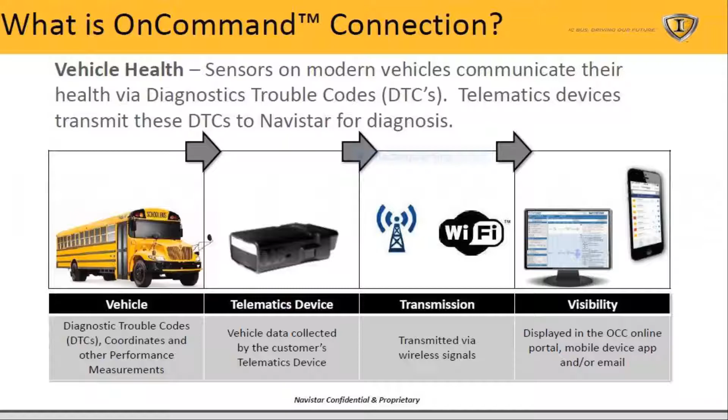Productivity, service information, and of course, the next generation now out there in the business is electronic driver logs. Next, please. Thank you, Marcia. So we've got a vehicle. What I do every day is work with a customer, work with a national fleet, work with a dealer. They have a light on the dash and they have a concern. So telematics takes that DTC through the telematics device, transmits it, and makes it visible on a screen. It could be on your phone, it could be on your laptop, however you want it to come through, or both, of course. Next, please.

So it's a remote diagnostic process. It'll increase vehicle uptime because it's almost instantaneous. We're talking in minutes. It'll certainly decrease the cost per student for transportation because you become more proactive in the repairs rather than reactive. You know, how many of you have had drivers that'll drive the bus no matter how many lights are on the instrument panel, as long as the wheels turn around, right?

Because it's their bus, it's all set up for them and for their kids. So most importantly today, what we'll talk about is that it's able to streamline the communications between you, Neal, and Navistar. And that's the link. That's very important, you know, for customers that are in remote areas, too far away.

And I've driven in Baltimore and Washington. I lived in Leesburg at one time, 2.5 hours to get downtown DC. So I know about transportation and the terrible roads. So this is an opportunity to make this communication process very, very easy.

Out there at the school districts, it helps the process from dispatch, drivers, and technicians, and we'll talk more about that. It's all-makes capabilities.

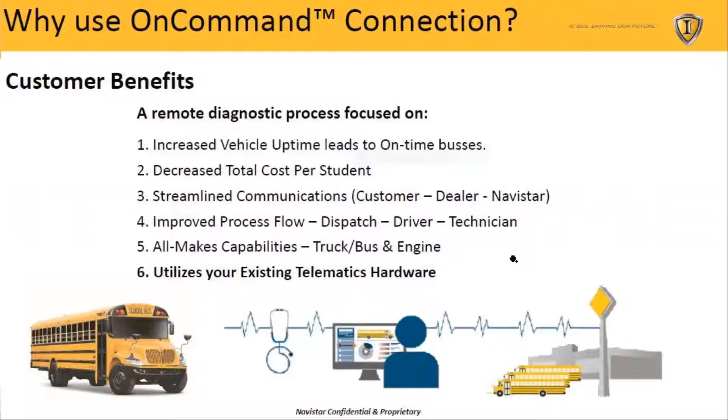If you ever watch those TV commercials about safe drivers, what do you think's in that vehicle? It's a box, it's telematics, and what are they doing? They're monitoring your speed. Are you doing 55 in a 45, or are you a quote safe driver? And the best part is our system, OnCommand Connection for Service, utilizes just about everybody's telematics hardware, as I've mentioned before.

So what do I see out of this? What do we do every day? What does Marcia's team, the Neal service team, do every day? They'll go in and they can monitor the vehicle. They can pull up the screens. They can look at fault code severity, scheduled maintenance, fault families, advanced filtering, and so on. But most importantly, health reports, vehicle GPS location, access to the service portal, and certainly repair advocate and service partner, some other programs that we have in the system.

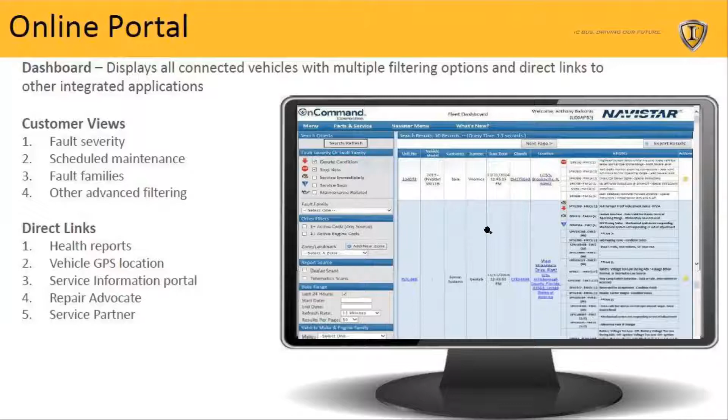So you'll hear me harp about this. In order to repair the vehicle, we have to have access to the service portal or the dealer, certainly, so that we can start the process. And using this service portal access can help you navigate through by hyperlinks to diagnose the vehicle, find the parts, understand what tools you need, who has the parts, and certainly repair the vehicle.

So once we have access, we have telematics. Now we have a vehicle with a concern. We can go into the service portal, go into that front page that we just showed you, then click on connection, and we see the information coming from the telematics device. And the next thing we're going to do is click on that. We're going to get a health report.

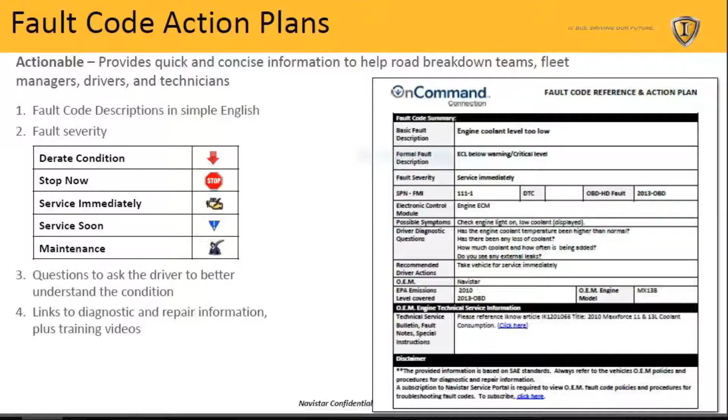So in probably the last 10 years, we have worked hard with this process. And, you know, IT people, service engineers, service people. So you have an action plan. We have a fault ranking to help you start working through this, because maybe you got multiple DTCs. They will give you guided questions.

The parts radar is, they will say most likely this part will need to be replaced based on the code, based on information that we have obtained. And the part is actually located at Neal, as an example. This impact report, tremendous amount of information, and we'll see that in a little bit.

One of the things the industry has done with DTCs, they created synthetic DTCs. How many times have you used your diagnostic tool and you found out you got a ton of DTCs? Which one do I work on first?

Many times manufacturers, including us at Navistar, will take from data these DTCs and say, if you have this, this, and this, we will create a synthetic DTC, and that will encompass all those DTCs and give you the one to start with. And we'll talk a little bit about that later.

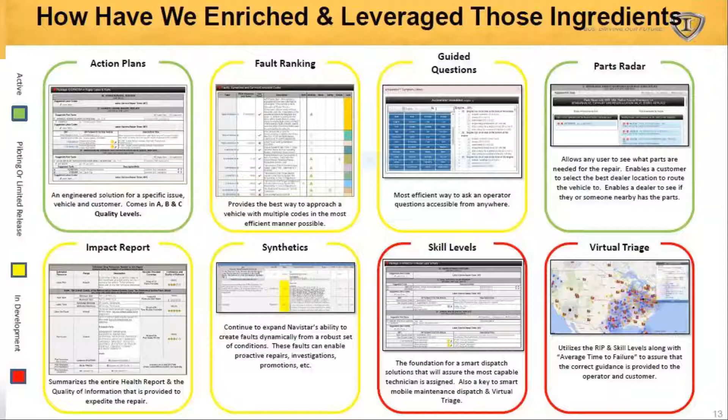and you simply turn on the key on the vehicle, plug this into the data link, push the little button, and what it'll do is it'll set a health report. A little bit different than ours, but it'll give you the information needed. And as an example, it will create that health report.

And let's say that you're handling 70 buses and you've only got one technician. So maybe you could call the Neal team and say, I've got a bus that's got a light on the dash and I'm really overwhelmed right now with state inspections, blah, blah, blah. Can you guys look at the health report and give me some assistance?

And they could very easily pull that up in the service portal, and they could come back and say, it's the left front wheel speed sensor. You want us to send you down the part, or let me walk you through the diagnostics.

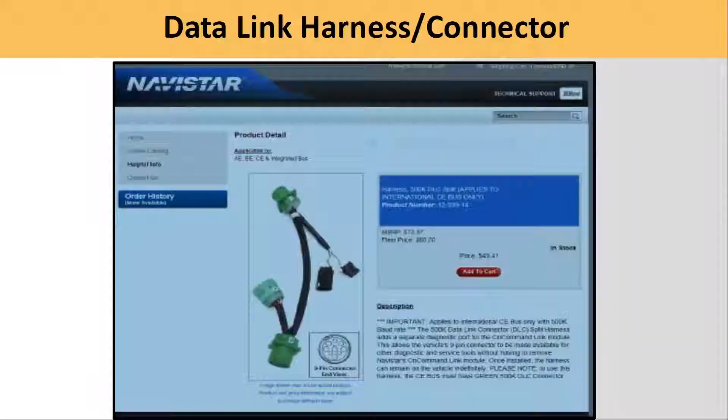So in a moment we're going to go to Huron Valley. Huron Valley is very close to my house, about an hour away. They wanted something to help them in servicing their buses, got involved with us, and went with OCC Telematics.

How does this work? DJ goes in the morning and looks at the status of his fleet on his screen first thing. He red tags the unit so the bus driver can't take that unit if it has all the lights on the instrument panel. If drivers call in saying they've got a light on the dash, he can log into OCC immediately and see the severity and give them advice accordingly.

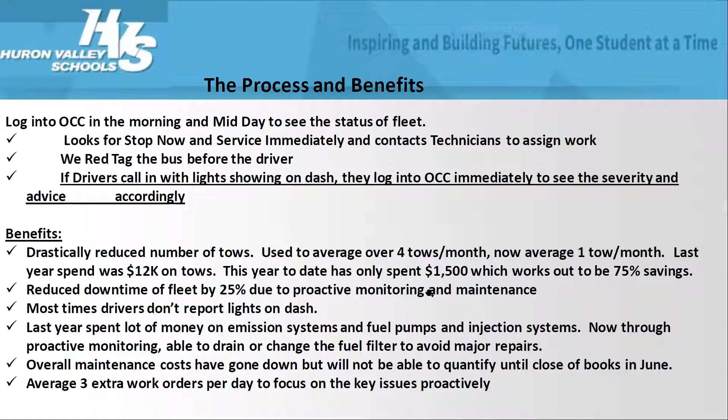One thing he noticed is his technicians typically handle 3 more work orders per day. But here's what's most important: they are proactive now, they are driving the airplane. Rather than having a bus on the side of the road loaded with kids, Huron Valley has the bus in their shop.

As always, it comes down to money. Last year we were up there doing some training with them, and Tammy asked, the board wants to know how do you put a cost on this?

So we said 5 repair orders every day, 5 days a week, 52 weeks a year, because they run all year. Half hour to discuss with the driver about the lights, get the keys, walk out to the yard, connect with the laptop, pull the codes, bring the bus in the shop. Pretty typical, right? Additional hour for the technician to secure a service manual, search for diagnostic tools and needed parts, that walk around the shop I used to do when I was a young guy. So we said it's about $117,000. To get to the bottom line, with telematics we're looking at $39,000. So we're saving money because we're being proactive.

This is Huron Valley. If you go to their website, good people, as mentioned, about 90 school buses, 80 in service, and good people to work with.

So if you learn anything at all today - and these slides, this presentation will be available for you - know that every vehicle out there has the J1939 protocol. I don't care if it's a propane vehicle, a gas unit, a diesel unit, or a CNG unit. Every vehicle has DTCs, and every DTC will have a fault code indicator.

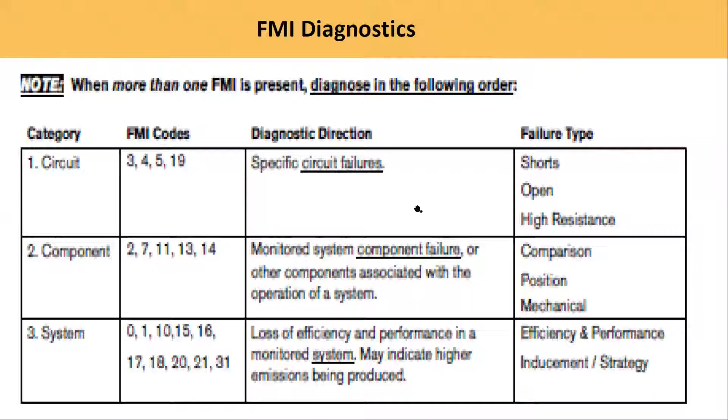Good stuff, next slide. So what we're going to do now is I'm going to take control of the program and we're going to go live at Huron Valley, and I'll save this slide here when we get back. Hopefully I can do this right. Does anyone have any questions?

Okay, are we good? Can you see my screen? Yes, sir. All right, perfect.

So just want to let you know where we are. So we're in OnCommand, and we're going to go see my friend DJ. And by the way, DJ's like my age, so old dogs can learn new tricks.

So we're at Huron Valley Schools. What I'm going to do - they have been running on and off with COVID, so I'm going to just kind of fill this all up, because I want to make sure that we have something to talk to. And then I'm going to hit search.

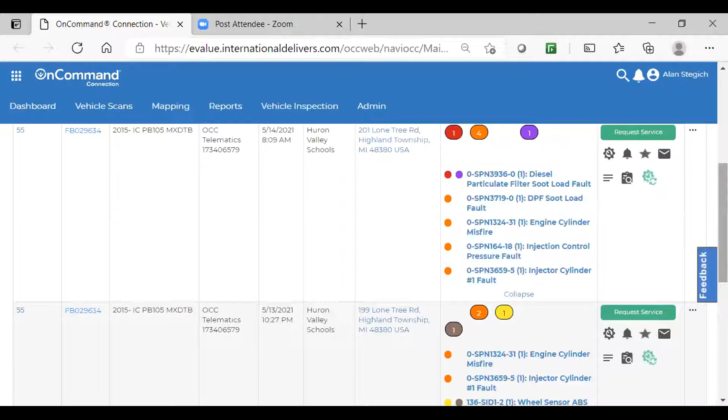So you can see here, there's a unit number 55. Here's the last 8 of the VIN. It's an IC Bus, a 2015 with a MaxxForce DT. It's got telematics. This is the time when the code was set, May 14th - excuse me, today's time, Huron Valley, and here's DJ's address.

And you can click on these - this is a stop now, this one here is service immediately, this is derate. So this one's got a bunch of codes, and I picked this because we're going to work through this one. As you can see, this is a bus that you want to take the keys away from the driver. So let's look at the vehicle.

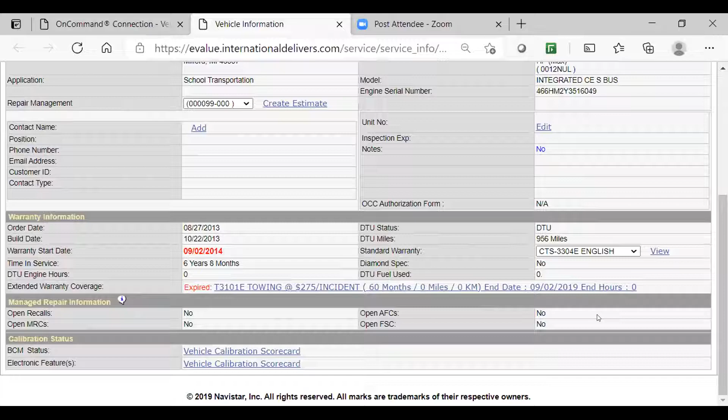So now we went to the service portal. All right, so we're at Huron Valley. Okay, we get the information on the vehicle. As you can see, it's 6 years, 8 months in service. There were some extended service contracts on the vehicle. There are no updates for any campaigns or recalls, AFCs. Engine information here.

All right, and we can go through all of these if we wanted, if we had the time, but what I'm going to do is we're going to talk about diagnostics, right? So let's look at the health report. So I'm going to pull my screen up here. Let me know if you guys are staying with me on the screen.

I did one of these presentations a couple of weeks ago, and I was having problems getting through the internet. So I went out and kind of clicked on these screens ahead of time, and I thought that everything would be good. And I lost the whole class until somebody piped up and said, Alan, we're still back at the original screen. So let me know if you're with me. I can see your page loading and the ID that you just clicked on. Thank you. You're welcome.

So this is the golden rule, the most famous screen of all is the health report, right? So the bus has got 102,000 miles, 13,915 gallons of fuel went through it. He's averaging 7.34 miles per gallon. He's got 6,000 hours plus on this. Here's the engine serial number. Here's the engine information. All right, here's the telematics when this was pulled. This DTC, last GPS, it's at 201 Lone Tree Road, Highland Township, Oakland County.

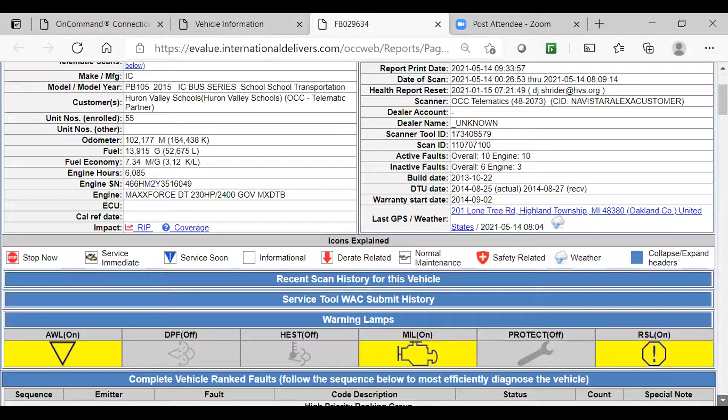Okay, so this is kind of neat. See, it says warning lamps. So if you went out to the yard, put your keys in this unit, turn the keys on, these are the lights that are on the dash. So if you have OCC telematics and you're on your screen and you happen to look at a bus, if this bus was running down the road right now, I could actually call the driver and say, you got some lights on your dash? Like, do you have a triangle upside down on? Do you have a MIL light on, the little engine? What about this one where it says stop? Have you got that light on, right?

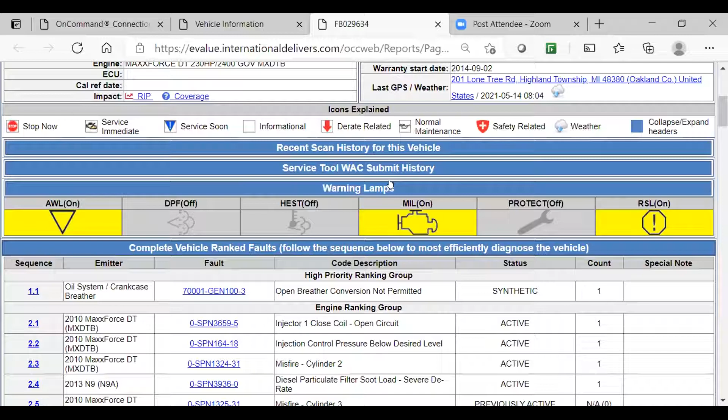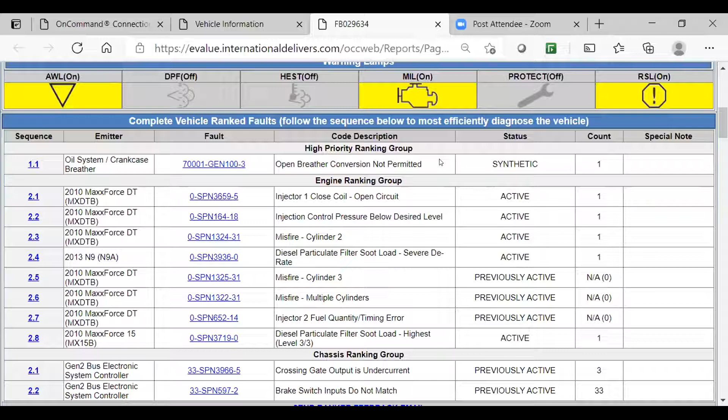So this is live. So first thing off here, there was an update for oil systems for the crankcase breather to go external. And if you could see here for information, this vehicle was not allowed because of emissions. So now I'm looking at, oh my God, Alan, what do we do here? We've got all these DTCs, right? So first thing we're going to do is go back and look at these. The first one here is a 5, right? So that means it's a component, injector. It says the injector, close coil, open circuit. So that injector, that component is not working. But if you look at the code, it's a 5, so it means there's a circuit problem, which means it's a wiring problem. And then 18 is a performance.

Well, if it's an 18, it's performance. Why is it going to work if the component's not working because there's a wire problem? How is it going to perform correctly, right? 31, again, is a performance, cylinder misfire. 0, once again, system performance. Diesel particulate soot level. Well, looks up here, we've got an injector problem. We got another injector problem, 6-cylinder engine missing on 2 cylinders. Okay. And then you got 31, you got another misfire. What I don't know, and you guys are smarter than I, okay.

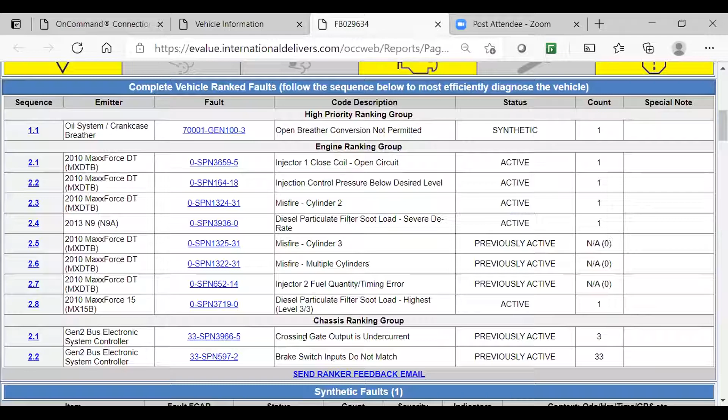Now, back down here, crossing gate output is undercurrent. Those are electrical, and this is some information. As an example, I had a ton of ambulances for a long time, and we would see a lot of electrical faults. When they flip a switch, they have the horn pad wired in for the siren, right? So every time they would push the horn pad for the siren, the horn circuit would have an undercurrent because instead of a load with the horns, it was tripping a relay for the siren.

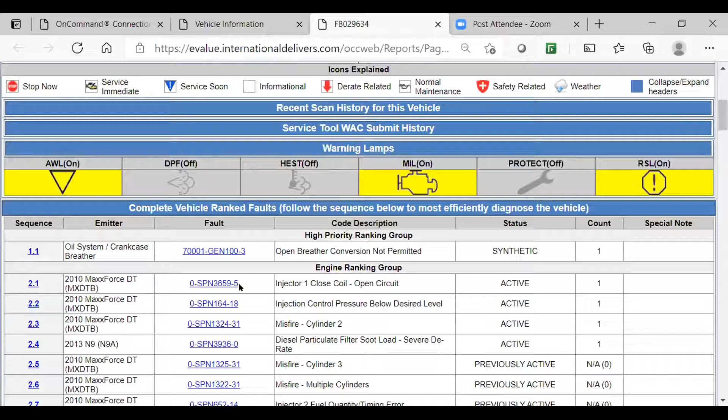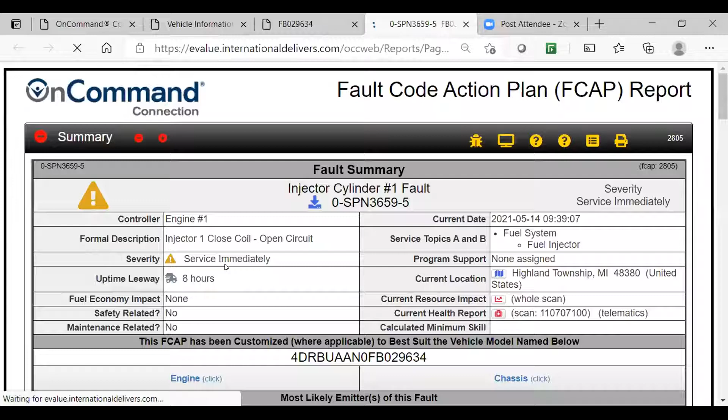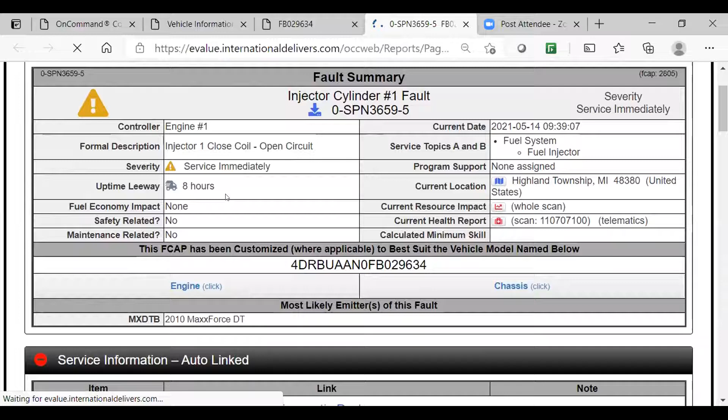So let's take this one, and the one we want to look at is obviously the 5. So we're going to click on the DTC because it's a hyperlink. So here's my fault code action plan. Injector 1, close coil, open circuit, service immediately. Maybe about 8 hours to get in there, right? So engine concern, okay, and you can see here service information.

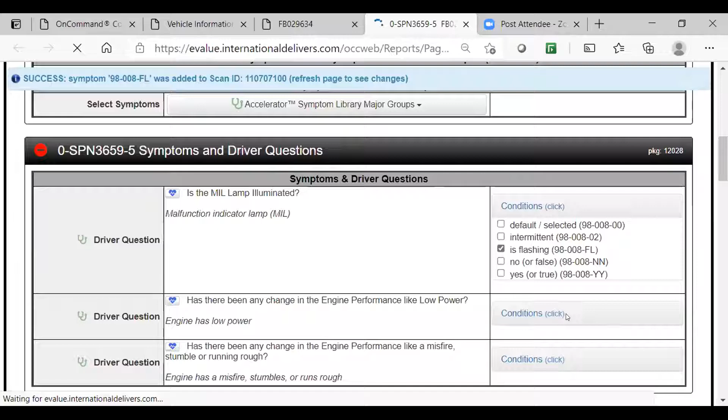All right, here's some questions that you can ask. Default selected intermittently, is it flashing, no, or false or yes? So we can kind of go through there and say, is flashing, driver question, has the vehicle got low power? And we can kind of work through these questions for the driver if we want to, okay? And has there been any change in engine performance? Well, yeah, I guess I'm going to put here, okay.

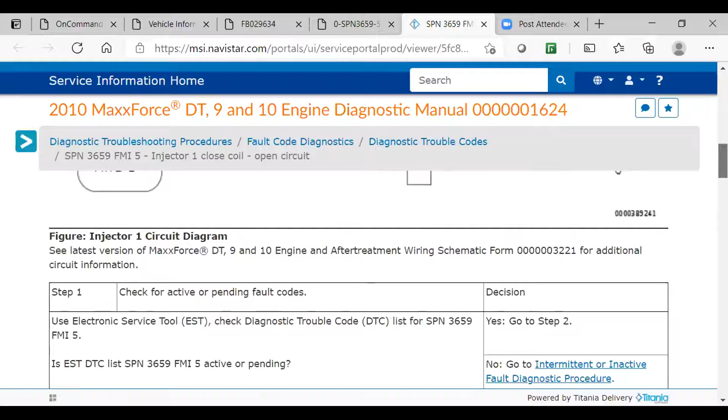Then what I'm going to do is, guess what? I'm going to click on here, and it's going to take me into the service manual. So here's my instructions for the service. Here's my wiring diagram. Okay, and here's my checks. Well, we kind of figured this, right? Anybody would say if they've had a lot of experience, well, you got to pull the valve cover off and you need to look at the harness, right? And it looks like injector 1 through 6 connectors, huh? Check the resistance of each injector.

But here's the diagnostics. Here's what makes it easy for you to work with, you know. And if you want to put down electronic service tool, so I think what you can see here is this makes it so easy. You know, in my time, you rolled the box up and then you went and found the service manual. You had to thumb through the pages and then you got into it, and then you might have had to go out and get a wiring diagram. All this information is here at your fingertips. And that's what I wanted to show today.

I'm going to go back one and go back 2 pages, excuse me. Geez, let's see where we are here. So I talked about this RIP report, okay? I wanted to show you that also. Hopefully it'll come up here. This is where the health report expanded. We have expanded the health report to help everyone. Hopefully we'll get through here. There we go. So, pretty good information here, as we mentioned before.

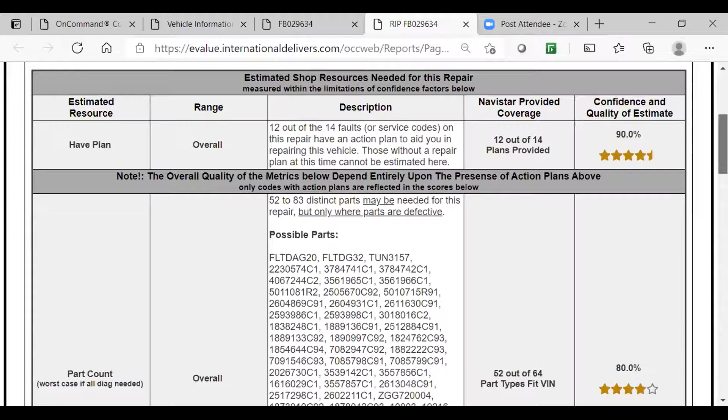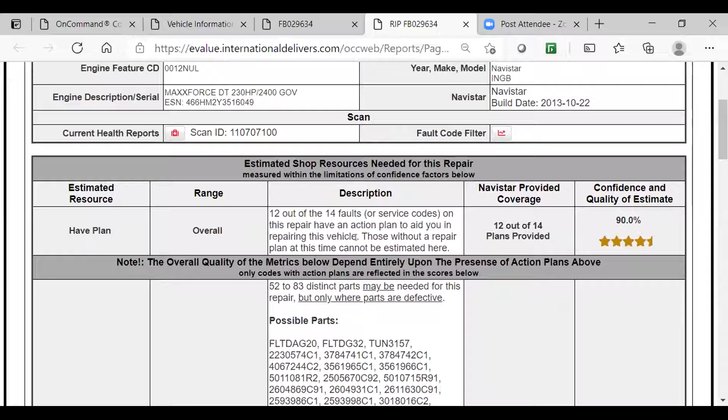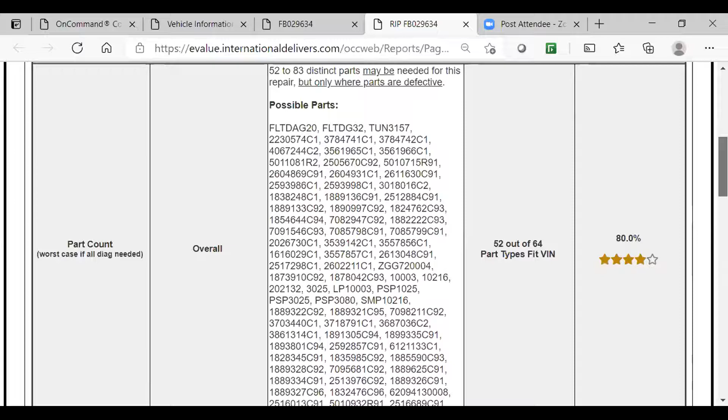Labor time, here's what you got here. We have a plan overall, 12 out of 14 faults, service codes on this repair, an action plan to aid you repairing the vehicle. Confidence of where we need to go is like 90%. Possible parts. Here's some information on parts, part count, labor time. I like this, 79 hours. I guess that's doing an overhaul, right? 79 hours, 30 minutes.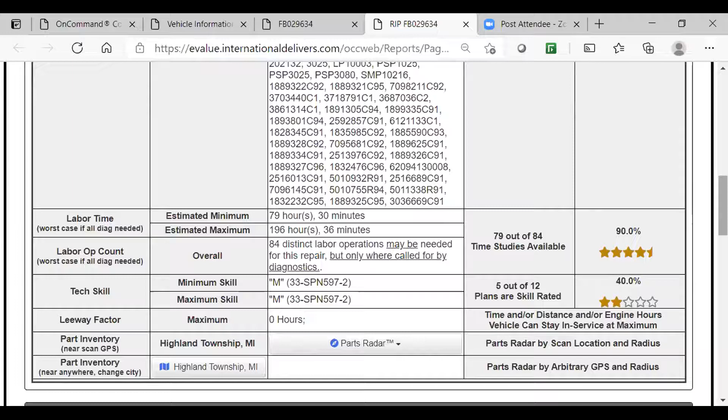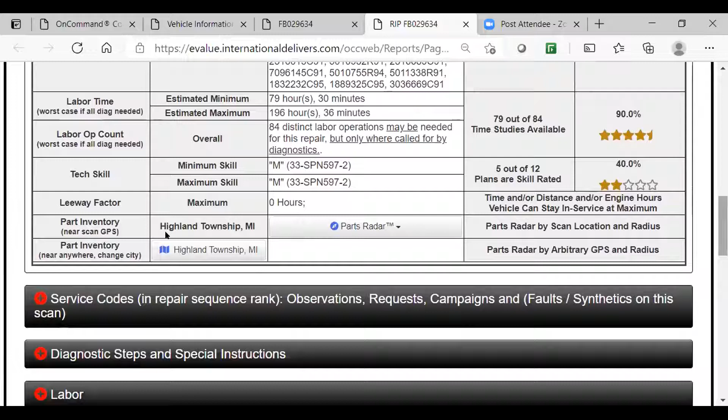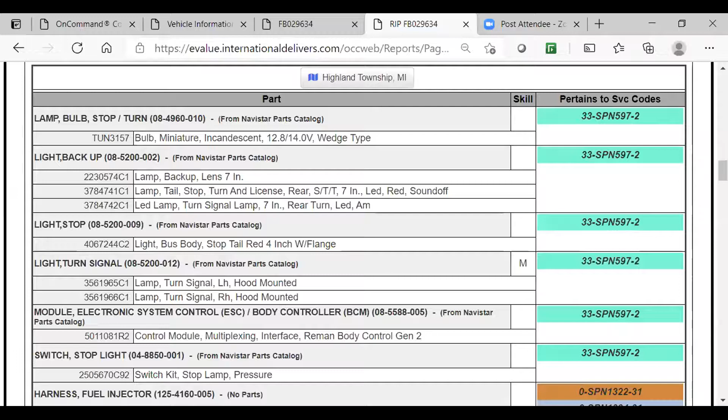Skill techs, we're looking at 5 out of 12 plans are for skill rated, okay? Where we're at parts radar, we can go 60 miles radius and see who's got some parts. I hope this comes through. Service codes, if you needed to do the ranking, the diagnostic steps, okay, special instructions, labor time, parts, okay. I don't know why it's doing that. There we go.

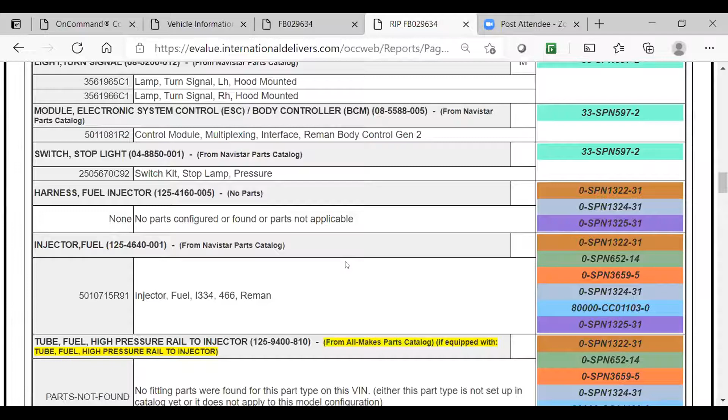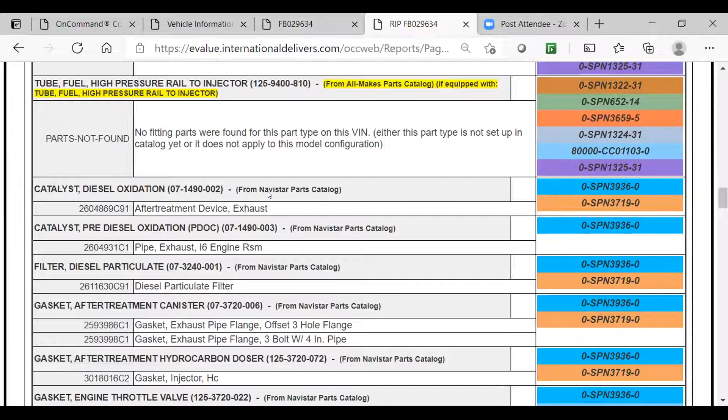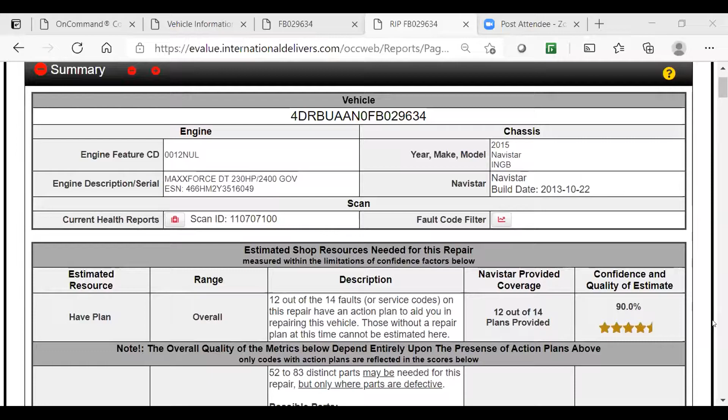Harness, fuel injector, here's your part number, here's your injector part number, fuel rail pressure, here's your information on those parts. We talked about the catalyst. Here's some part numbers here. So you can kind of see that a lot of information, sometimes too much, so to speak, but it's there, it's available for you through this RIP report. Tools, training needed, questions, warranty codes if you're doing that, call out summary related parts we talked about, and feedback.

So a ton of information, and we did this all in what? 10 minutes, 10, 15 minutes. So we didn't go out to the bus. We didn't plug in with a scan tool. We didn't talk to the driver. What we had is we had a heads up information by logging on the system in the morning like DJ does. He looks at this, he looks at his screen, he looks at the vehicles that are service immediately, stop now. He pulls the keys so that the drivers can't go out with this bus.

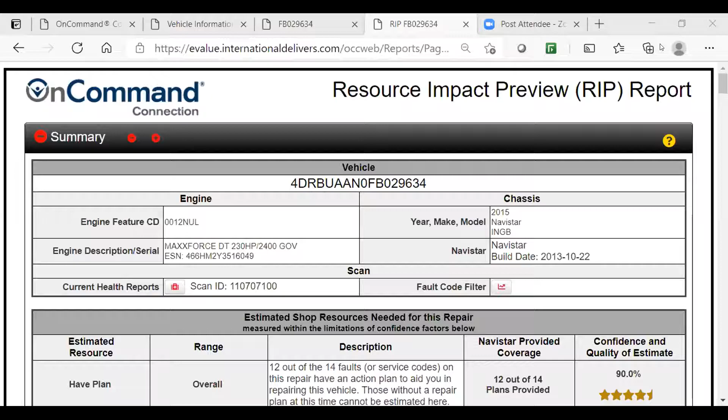So he's not embarrassed to have his bus on the side of the road. He pulls the keys, he distributes the keys to the technicians. They have access to this information that we just went through, and they repair the vehicle. That's how simple it is. Much easier than the old days of going out there, talking to the driver, going out there, pulling the codes, bringing the vehicle in, and starting the repair process. So I hope that was very helpful for you guys today.

So basically, if you've got telematics, OnCommand connection is easy to do. You can work with Neal to have them support you on that. If you don't have access to the service portal, I would highly recommend getting that diagnostic link from Nexiq. It'll make your life easy, and you can work back with the Neal team. I created a health report, can you help me with it? Whether it's technical or they pull it up and say, hey, looks like a wheel speed sensor, let me get one out to you.

So tremendous opportunity, tremendous value working with telematics. I get excited about this, as you can probably see, because it really makes life a lot easier. The service portal, I've been doing this with Navistar for about 8 years or so, and I still haven't learned everything that's in the service portal. Certainly the hardest part is navigating. The information's there, it's just navigating to get there. But that's what that health report does. It starts the process. So if we can create it with telematics or with a diagnostic link, it's easy. Any questions?